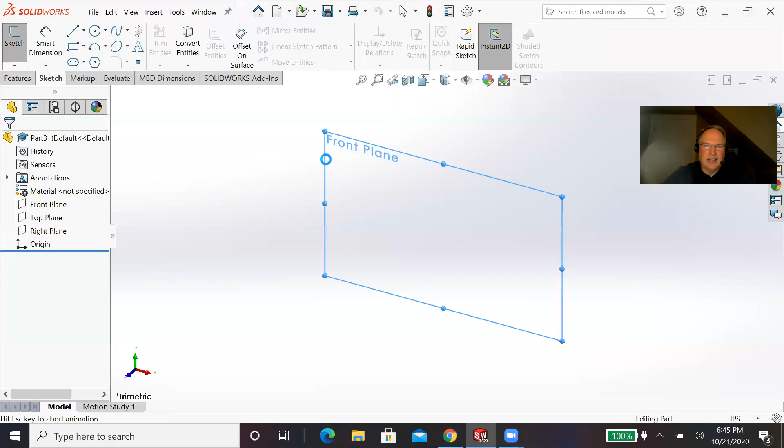You can do either a corner rectangle. I'm kind of prone to these center rectangles where you start right at the origin and it comes out from the center, just a different way of building it. Could you have done a corner? It works the same way. So I just did a rectangle.

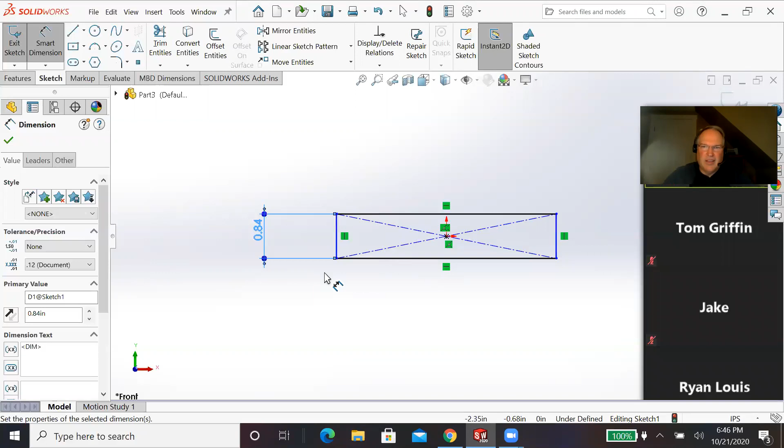I'm going to add some constraints or dimensions to it. Looking at it from the front, the total height is 0.84. Now, the interesting thing is, because I'm going to be giving you these drawings fully dimensioned, the height on the front, the height on the back, everything has to be 0.84. And if you follow the directions, you'll be fine.

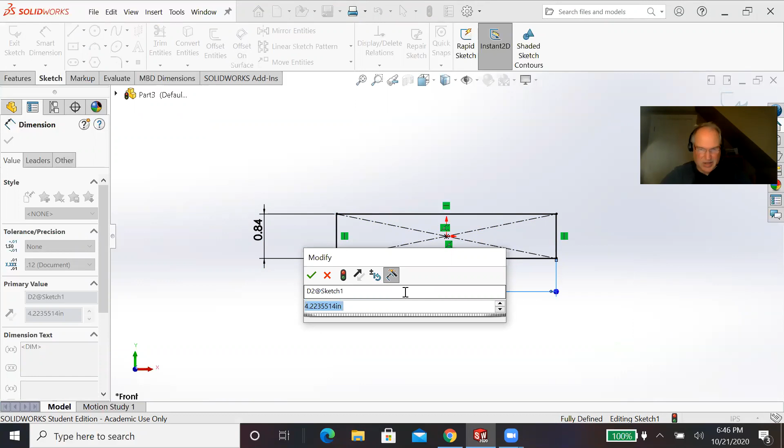But you would be shocked how many times I have students pass in parts that were all different heights. Like, the car is supposed to connect together and they're all supposed to be the same height. How did they not become the same height? You never went back and checked to make sure that your cars are all the same height. Just interesting things that you run into.

Right there, there's my basic block. We're going to extrude boss base. It has already found the profile. Profile looks good. And the depth, according to this, is 0.75 -- excuse me, 1.75. It's a square block.

For some reason that doesn't look right to me. 1.7. Yeah, okay. Now, as we are working on the next section, where do we begin?

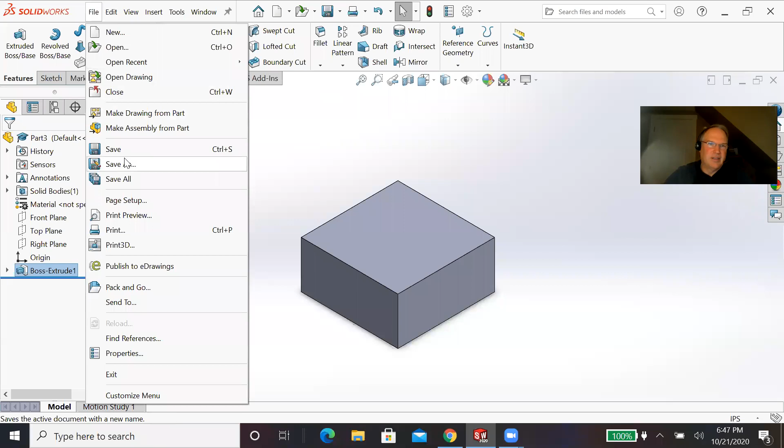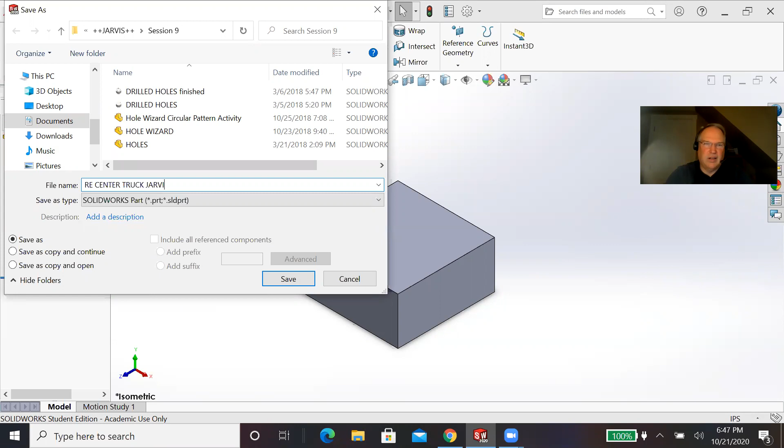That's a good question. I usually start with something simple, build the confidence up, right? Or better yet, file, save as, find your folder, session 9. I'm going to save it right in here. I'm going to call it center. Sometimes I actually put RE, center, truck, and then there. Now that I have it, it's right here. It's not going to go anywhere. You may even want to create a folder with all that stuff right in there.

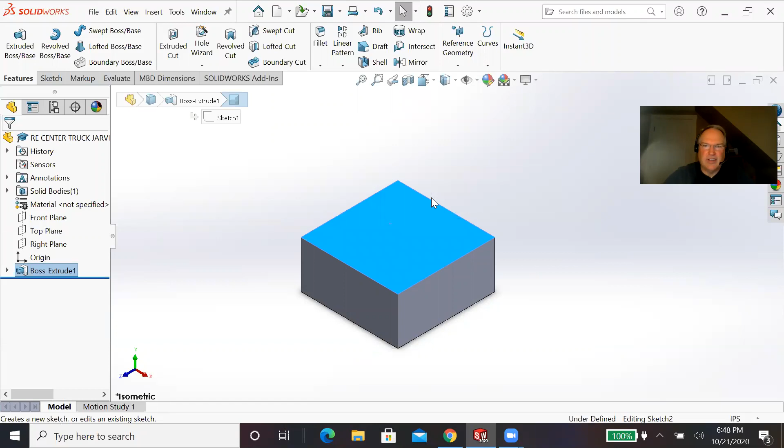So now I'll do another sketch. Sometimes I just click on the surface. I add the sketch here. I'm going to look at it from the top. I don't like the way that moved on me. There we go, I got my sketch on there. I'm going to do 2 circles. These are the holes for the top. This is the holes for the windshield. Notice I don't pay any attention to where the circles are, what size the circles are.

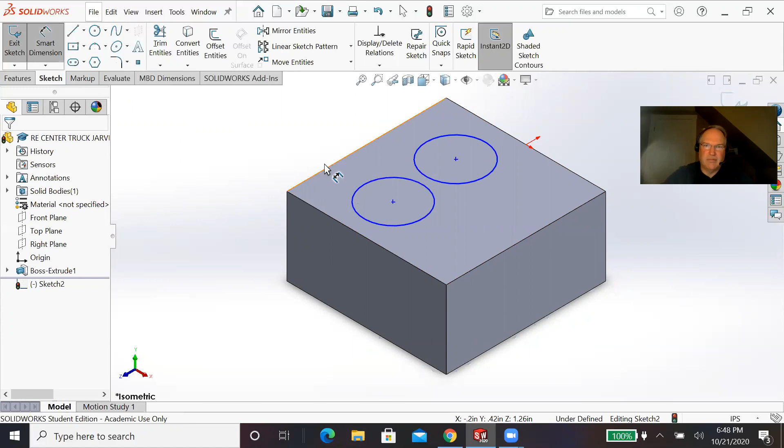It doesn't really make any difference to me because I know I have to put on location dimensions and size dimensions. I have to constrain it down so that this, from here to this center point, smart dimension -- it states that it's 0.85.

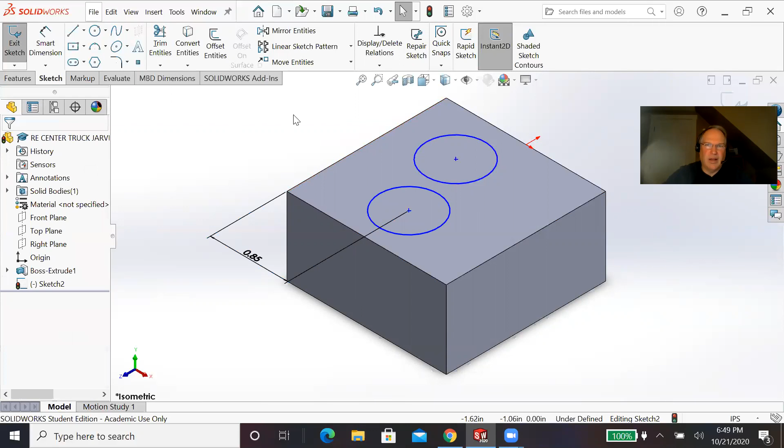Now, this is kind of interesting. I could do the same thing to the other side. I could add another dimension, or I could go back and add a relationship, add relation. I pick this center, and I pick this center, and I could say I want them to be vertical. And notice they line right up. That add a relation just saves you from dimensioning. It does the exact same thing. The good thing is, I guess, if I move this dimension, it would actually move both of them because now they have to stay vertical.

So I added that relation. So the next step would be to do another dimension from the front edge back. That looks to be 0.55. And I'm going to do the same from this side, 0.55, to make sure they're the same distance. By the way, this is probably the most important dimension. And the reason I say that is because when you line these up with the pegs, sockets in the back and the pegs on the front, they all have to be exactly the same. So it's important that they are. Otherwise, imagine that if you have all these parts built and none of them line up.

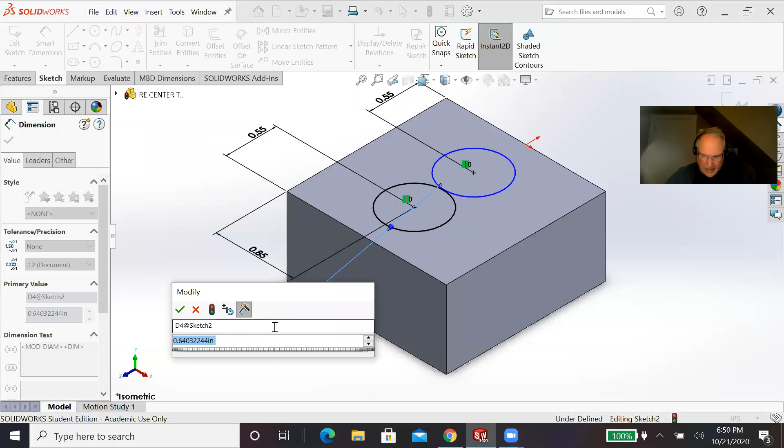It says that this is 0.4, and you can either dimension that with a size dimension, or I can go back and do my relation and say, I want this and this to be -- arc.

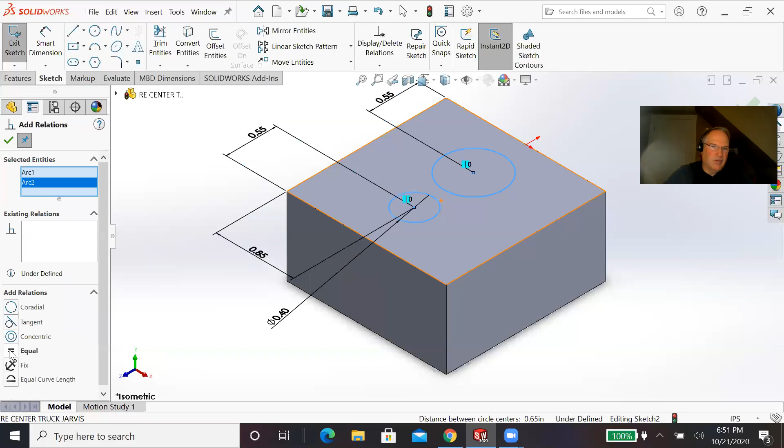I must have gone and didn't say add relation. Add relation here and here should be equal. Now they're the same, so I didn't actually have to go back and dimension the other side. The good news about that is that if I ever change the value of this, the other one will change at the exact same time.

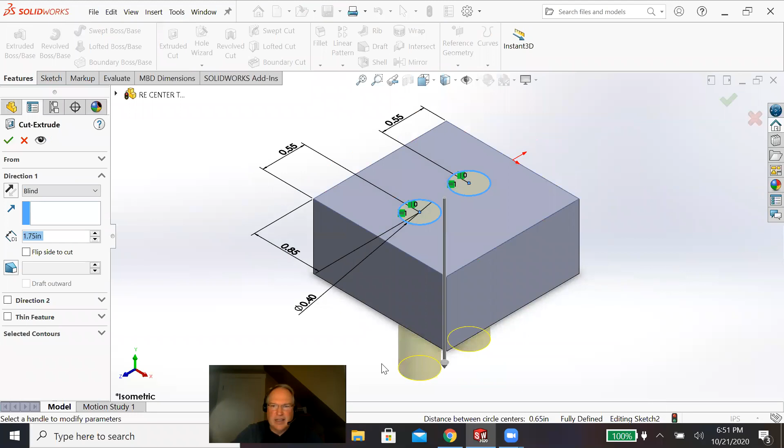Now that I've created that sketch and constrained it, I'm going to finish my sketch. I'm going to go back over, as we've done many times before, and extrude cut. Now let's see how far down this goes. There we go, 0.4, depth of 0.5 times 2.

Times 2 is a reference, meaning there's 2 of them. And that saved me from having to put another dimension on the back. That's the kind of thing you can get away with if you're familiar with the dimensioning practices. Over here it says blind hole already, so I just got to specify my depth of 0.5. And I got my first 2 holes.

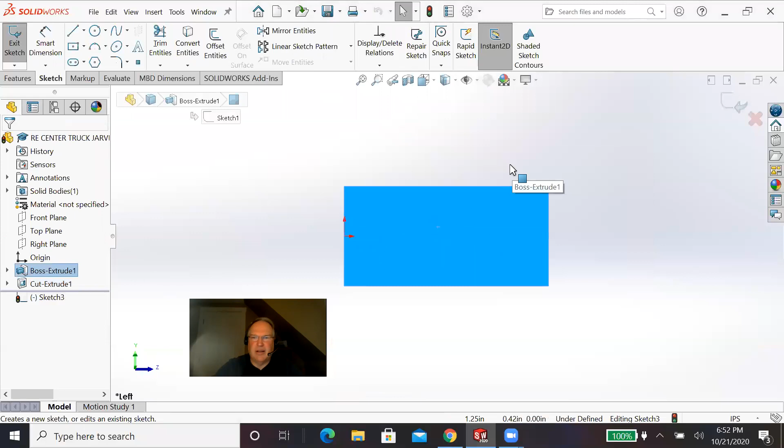Easy. Now I'm going to flip around to my front, and I'm going to build a peg right on the front. I'm going to pick on the front so I can see it better. This is how we're going to go with that. Pegs are just circles.

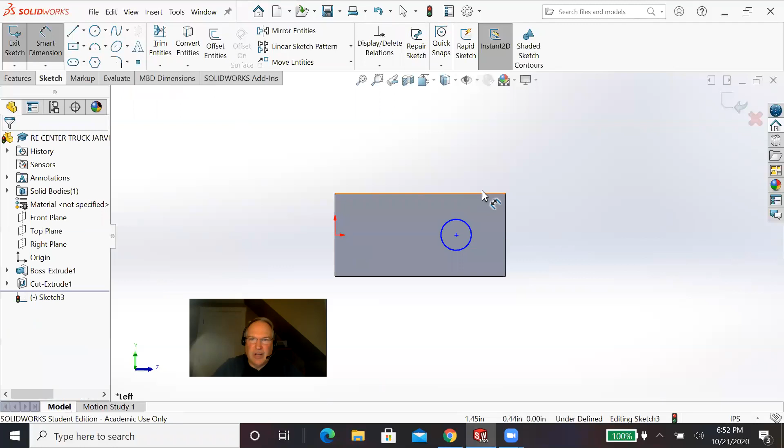Notice when I picked that, it automatically grabbed that center point, and that was okay with me because I do want it to be in the center. If it didn't happen, I would have to add a dimension. To be perfectly honest, I'm going to add this dimension just to make sure that I did connect with it perfectly, and that's exactly what it should have been, 0.55. So I don't have to even bother with it. It has to be, and remember what I said about this dimension?

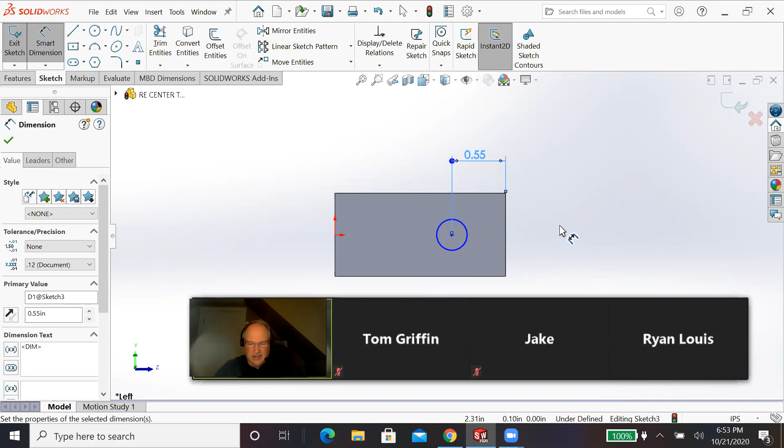0.55. Think about that. If there are sockets and the pegs are in different centers, different locations, your car is not going to go together, and that's not going to be much fun for you.

So next, I'm going to do this dimension, and I always start with the biggest part of it. Looking around, it appears that the biggest part is 0.33. Finish my sketch. I always go back and look at it isometrically when I do my extrusions.

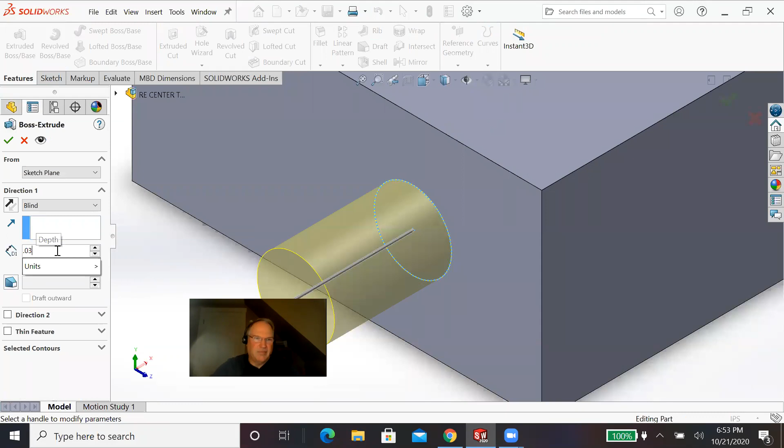Now this first part, it only extrudes out for 0.03, so it's not very far. 0.03. There's my first extrusion. I'm going to make another sketch right on that surface.

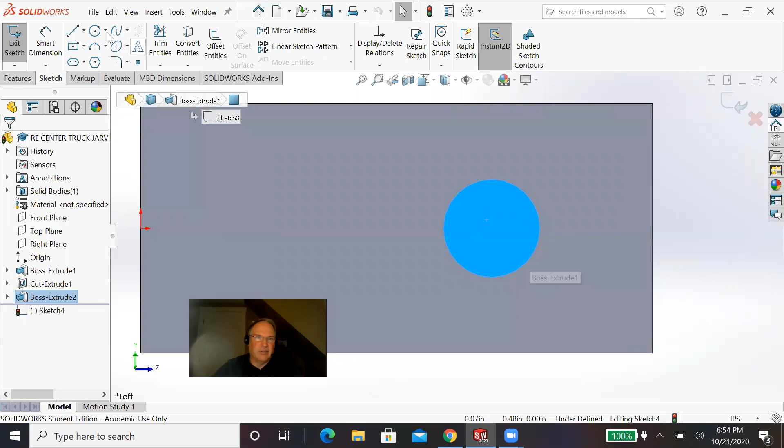Now because I already have a circle there, it just makes it a whole lot easier to create another circle. If I come down and try to pick the center, it doesn't work, but if I pick the outside, I don't actually pick it, I just see how it gives me the center now, and it'll snap to the center. The second one, I know I don't have to dimension the location because I've got the center. The second one coming out is 0.25.

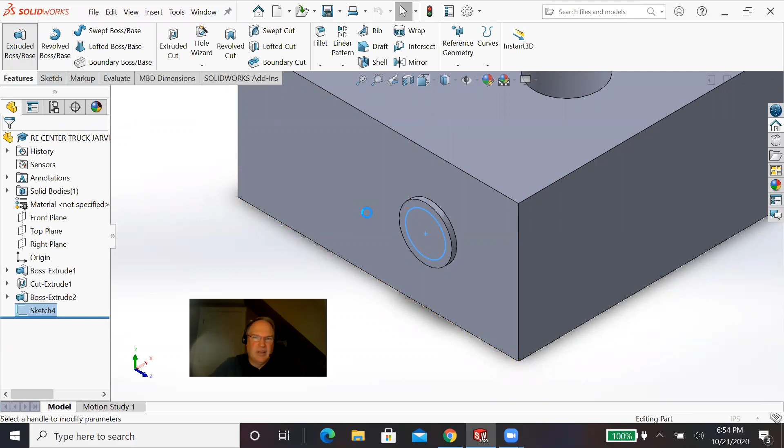Finish our sketch. Now I'm going to go extrude. As I'm looking at it, this one's going to come out, and once again you got to go back and kind of make reference up here. Coming out 0.33 minus the 0.03, because I'm coming out from the front of that surface at 0.03, I think. So I'm just going to come out just 0.3. It said 0.33, isn't that funny?

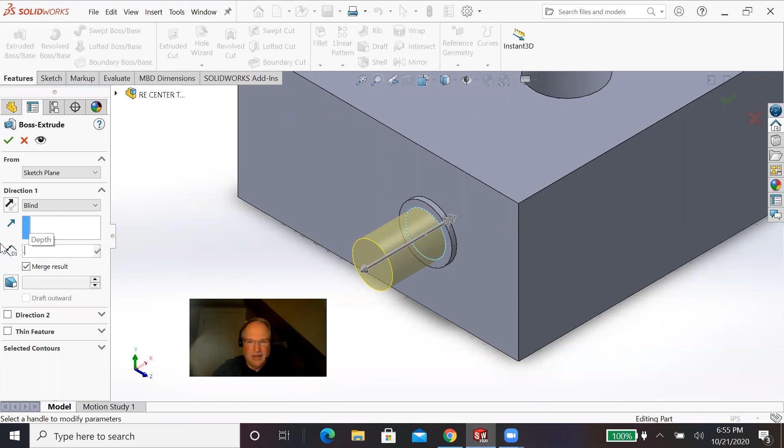Check. There, I got part of the peg. I'm going to do the same thing over again. Repetitive. Back.

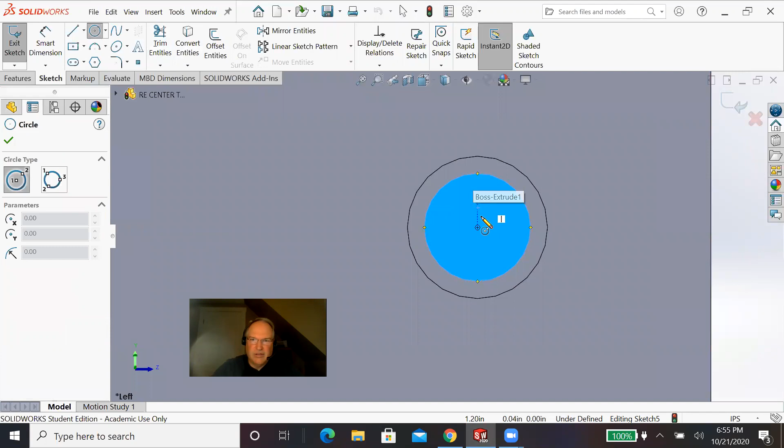Creating the same center circle. These are all concentric circles. This one's a little larger. I think that actually is right, 0.28. Is it 0.28 exactly? No, not even close. 0.28. Finish my sketch.

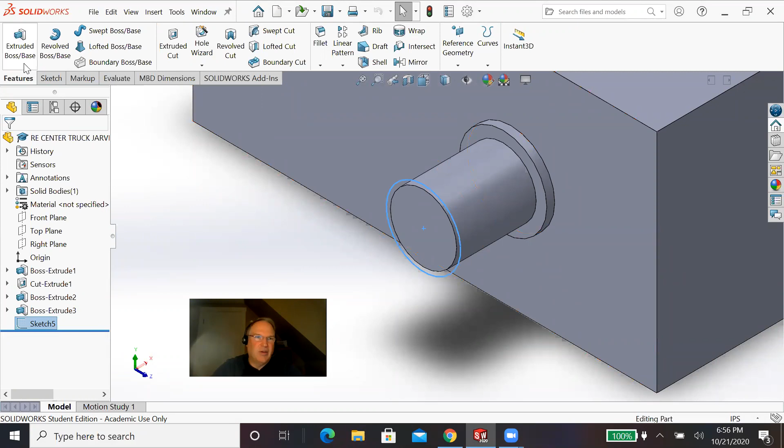If you extrude it while it's not in isometric mode, it just makes it difficult to really see are you going forward, are you going back. In this case, when I go to extrude, I'm going to go back, so I'm going to switch directions. And the distance is going to be the same as it was on the front, or on the inside, I should say.

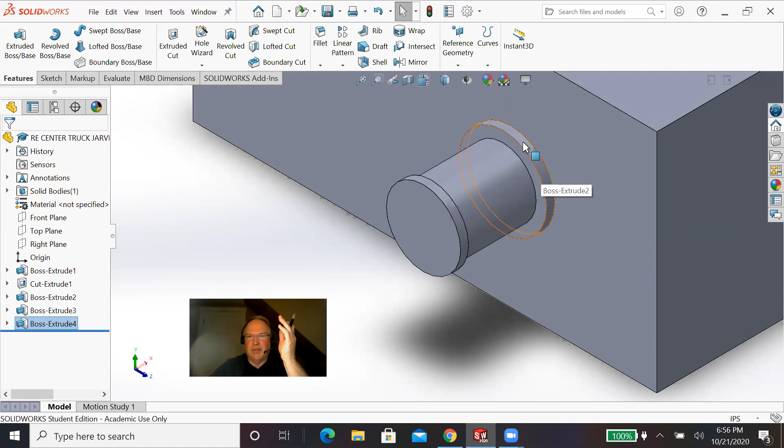So now really all I've done is 3 circles: this one's 0.33, 0.25, 0.28. That's all I've done is 3 circles. The next step would be another circle. Hard to believe, yes. Sketch.

On the front, this is the one that's going to cut the hole out of it. And the hole that goes through is, I think it's 0.4 - oh excuse me, 0.20. So I'm going to confirm that that's correct. 0.20.

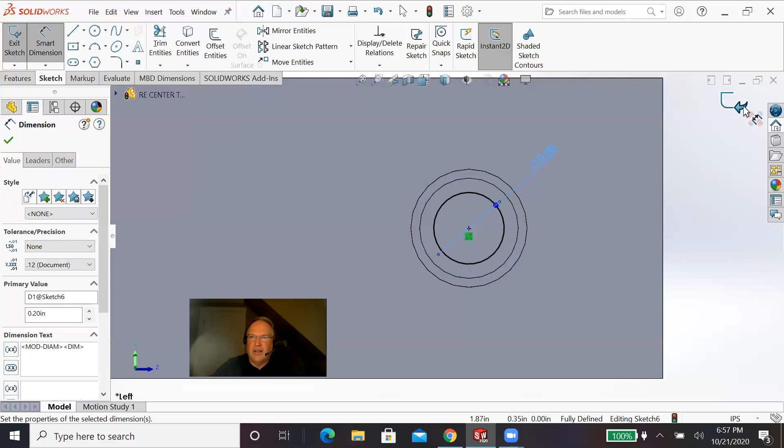And the depth of this, I keep going to that side. The depth of this one is going to be 0.5. Oop, see, I just did extrude, I've got to do extrude cut. There it is. It's funny that I didn't pick that out. Maybe I put that. Sometimes you bring your parts tree over here, pick on your sketch, cut 0.5. I thought it picked it out automatically, but maybe it didn't.

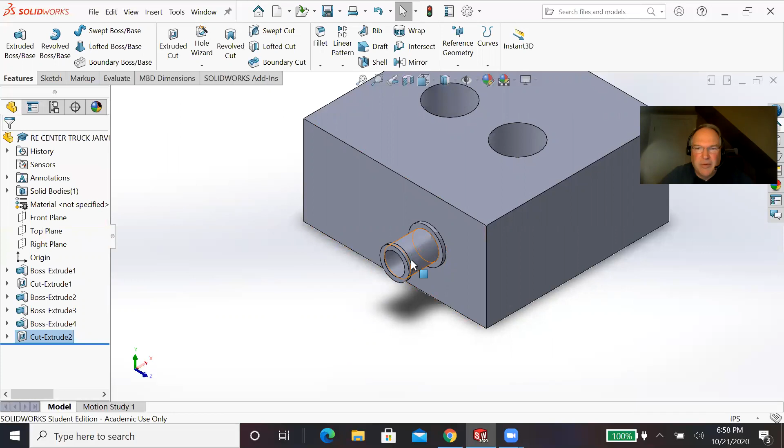So a lot of circles: 1, 2, 3, now 4 cylinders basically cut out, the last one was cut out to give you that shape. Now it's all the little nuances that make it look better. For instance, if you look carefully, it says that there's going to be fillets all over it, so I can come up and use my fillet button.

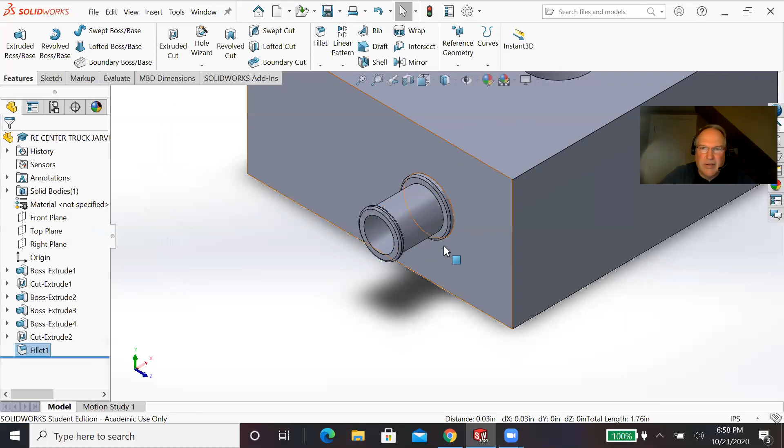And I'm going to type in 0.01. There's a series of 0.01 fillets - one here, one on the inside, and one here. You can see that it's just going to round it over, making it look kind of cool.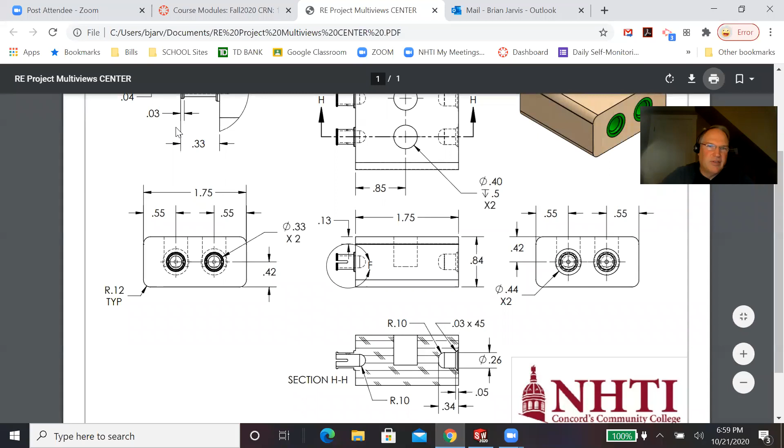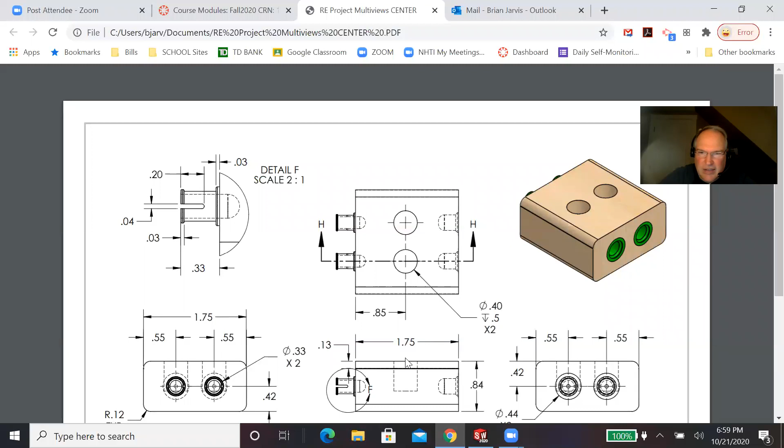Not looking bad. The interesting part - see how it has this little groove right here? There's a slot cut in here. This is going to give that end of it a little bit of flexibility, so when it goes into the socket, it's actually going to push out and really hold it on there nice and tight. So this is a 0.04, and it goes through both sides of it. Now, a lot of students think that's probably one of the hardest parts.

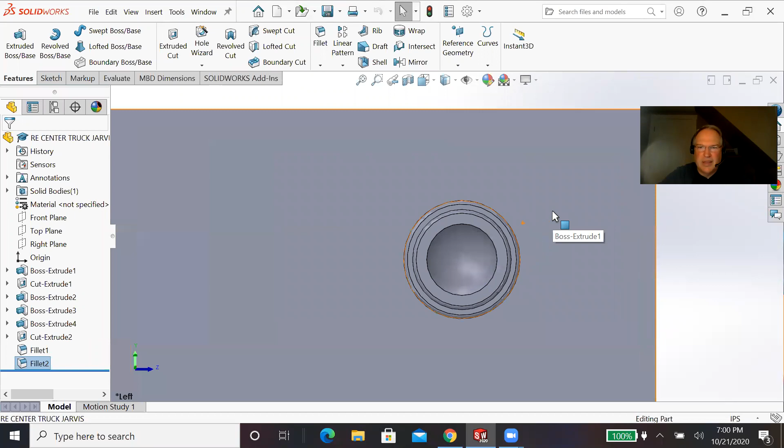The truth is, it's not hard at all. To do that, I'm going to look at it from the left side here, and put a sketch right on this outside surface. Right click, add a sketch. Remember this center point rectangle? I can still pick my center point, and I'm just doing a rectangle. Doesn't matter how big it is because we're just going to end up cutting it right out anyway. Boom, 0.04. And that's it. That's all you had to do for the sketch, which is kind of nice, right?

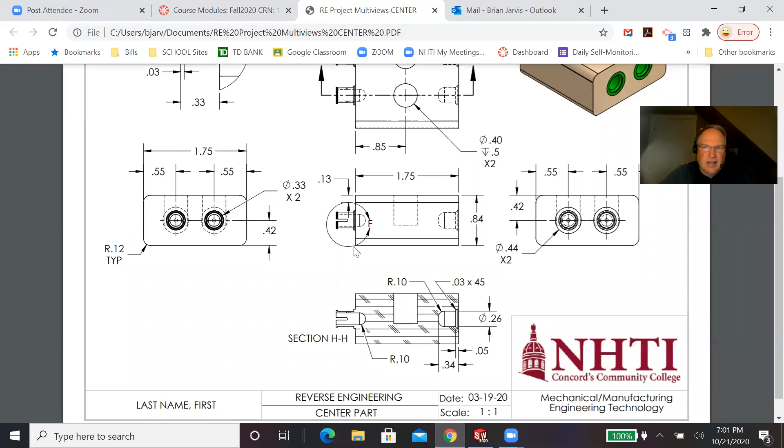Moving ourselves around a little bit. Then I'm going to go back and finish my sketch. Extrude cut, cutting into it. Must have a depth here somewhere - 0.2. Cuts in at 0.2. And check.

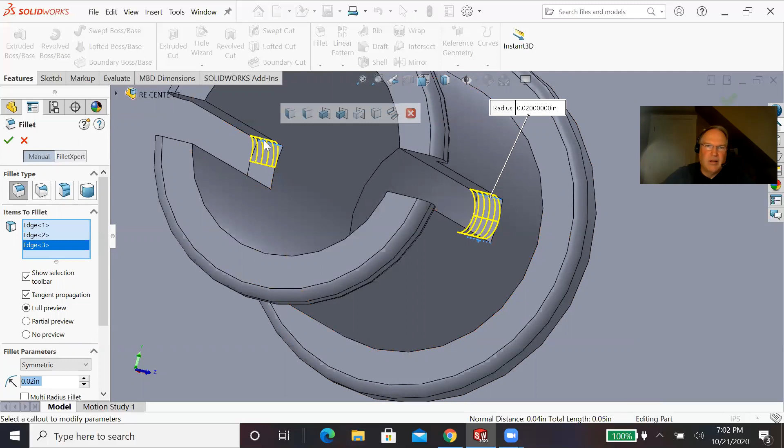So what looked to be pretty difficult, actually, if you use that center point rectangle, ends up being pretty straightforward. Now these are 0.02s to round the bottom. That's what I love about fillets - you can round a bottom with a 0.02 radius, rounded. Notice how I just picked the corner, and just picked the corner. And there you have your peg.

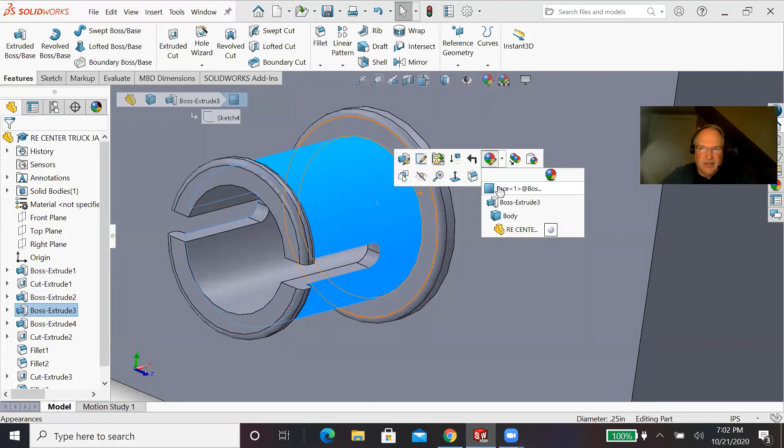Now, it doesn't look very good right now, so we're going to change the appearance of it. Some of you probably already know this, but if I select any surface on that, I can go to Appearance, and it says Face - I just want to change the face appearance. It allows me to pick a color. All these end up being pretty green. See how that picks? I can pick every single one of these faces, and it's going to, because they're all interconnected, turn them to a green color. The pain is trying to get all the different faces, the inside, outside.

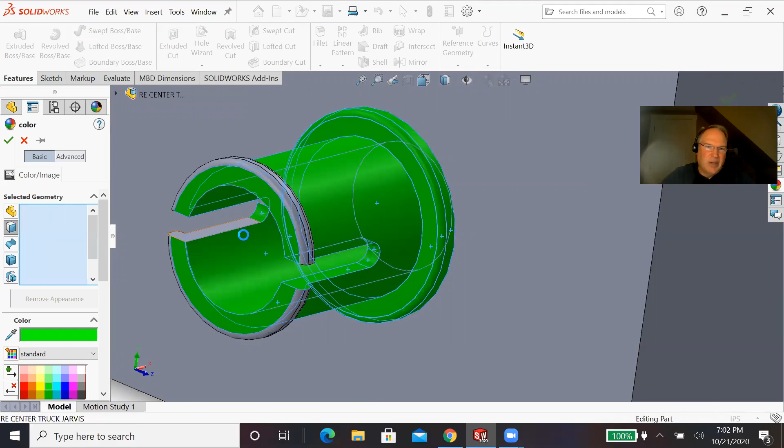I'm picking every single face that I can see from this point of view, and then I'm going to move it, and get all the ones I missed. As you'll see, I missed that face, and that face, and even this little tiny face here. Now, this is not changing the material at all - the material stays the same. What is changing is just the appearance of it. That's it. So I want to make sure I get them all before I hit yes. That's why it pays to move it around a little bit. Check.

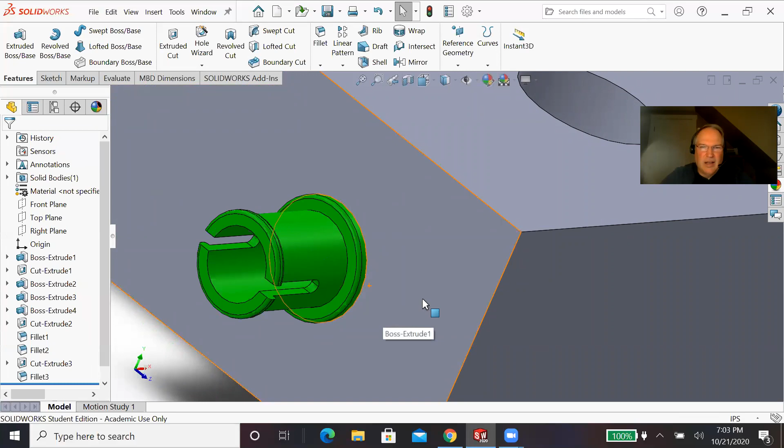Yeah, that's looking better. And that would be our peg.

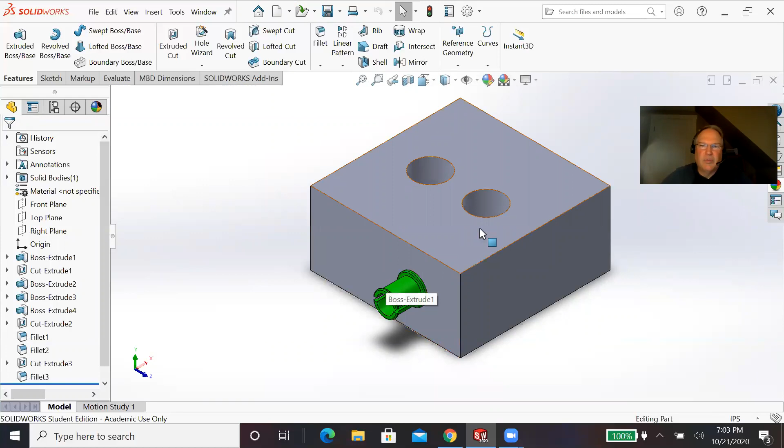Now, for those of you that were worried about having to do that again, guess what? You don't have to do that again. The one on the right and the one on the left are exact mirrors of each other, so we're going to mirror it over. Could we have done that with the holes on the top? We certainly could have, but it really isn't necessary - there are two very simple holes cut out at the same time.

Before we can mirror something, though, we have to have a mirror plane that goes right down to the middle of it. So I'm going to go plane. It says, where do you want the plane? Pick the front, and then we're going to go around and pick the back. Notice it automatically assumes you want a mid-plane, puts it right in there for you. Just hit check. And this is the fun part of it.

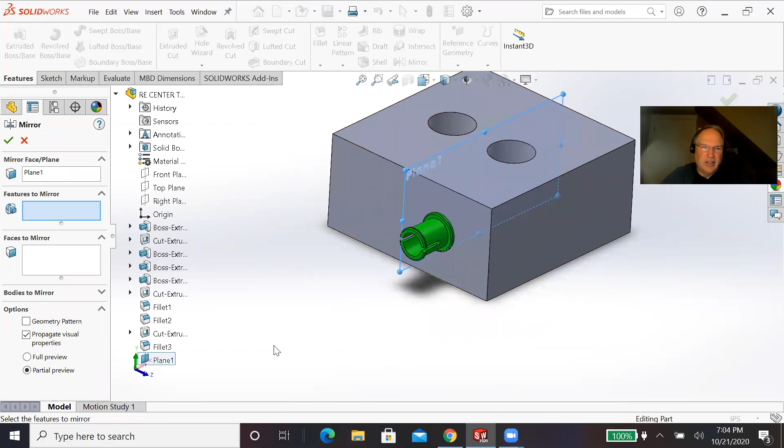Once you have the mirror plane, then you're ready to start to mirror. Now, when it comes to mirroring, I strongly recommend that you - well, it says pick the mirror plane first, so I'll pick the mirror plane first. Now it says, what do you want to mirror? Every one of these features has to be selected. That one - see how it comes, it actually appears. Every one of these features has to be selected, in technically no particular order. But once you have them all selected, how about this piece? What's that one? Yep.

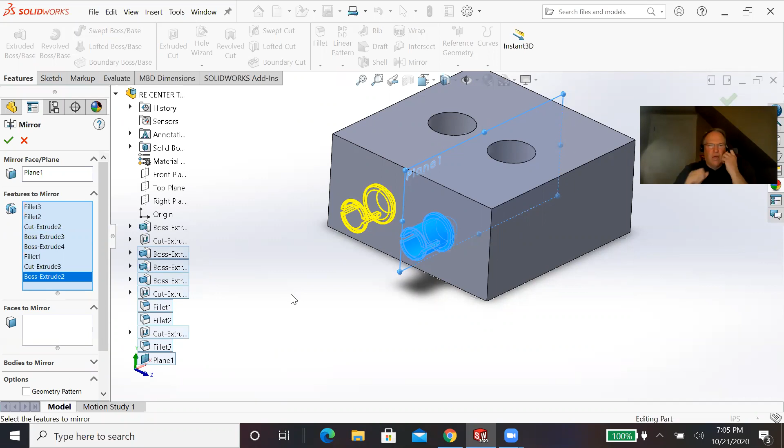Once you have them all selected, you simply say check, and you have the opposite side done too. You've got to think about all the different ways you can make this move a little faster. The sockets are a challenge as well.

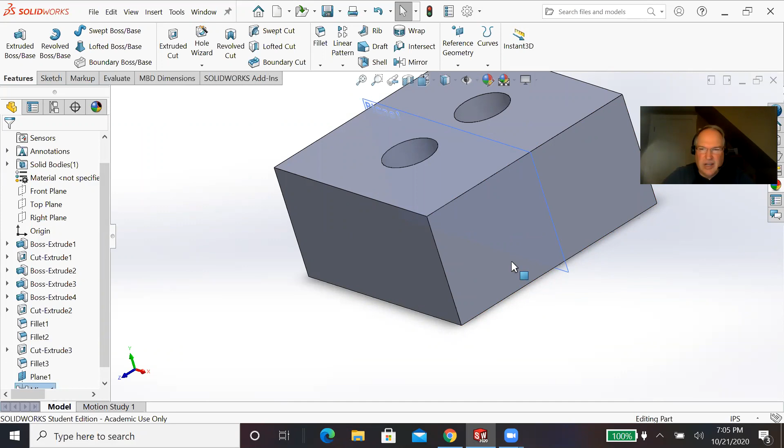They're not nearly as bad as the pegs, but the sockets definitely are a challenge. So we're going to start with a sketch on the back. I'm going to turn it around so we look at the back, and then start with the circles. I could do some reference geometry and pick the center to make sure they're all concentric - that's probably a good idea, to make sure this lines up. Remember what they're supposed to be - 0.55. They all have to be the same, 0.55, right? They all have to line up.

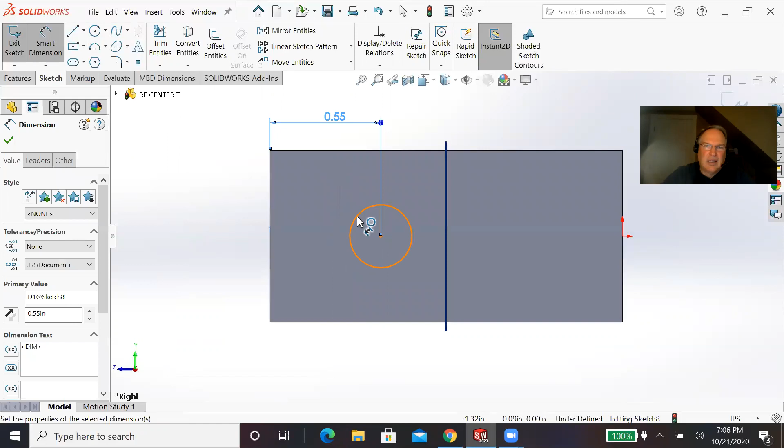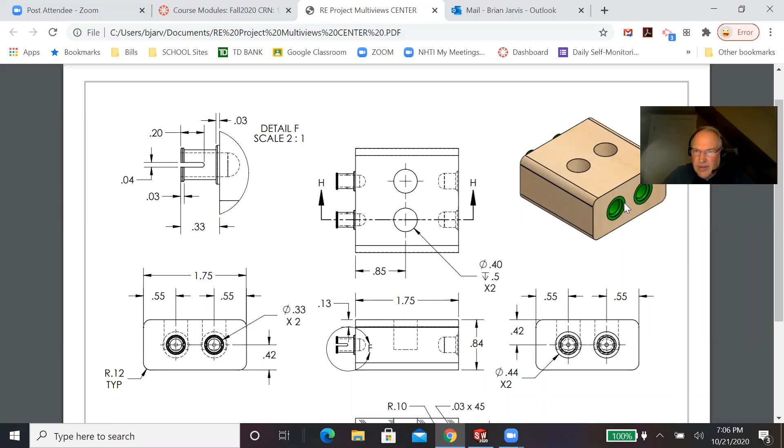This, from the bottom or from the top, shouldn't matter, should be 0.42. Because I hit center, it did it. And the first diameter we're going to put in - as we look at our part, we're building this side of it now. These sockets will be here on this side. 0.44 is the very outside, but that's not really the one we need to worry about.

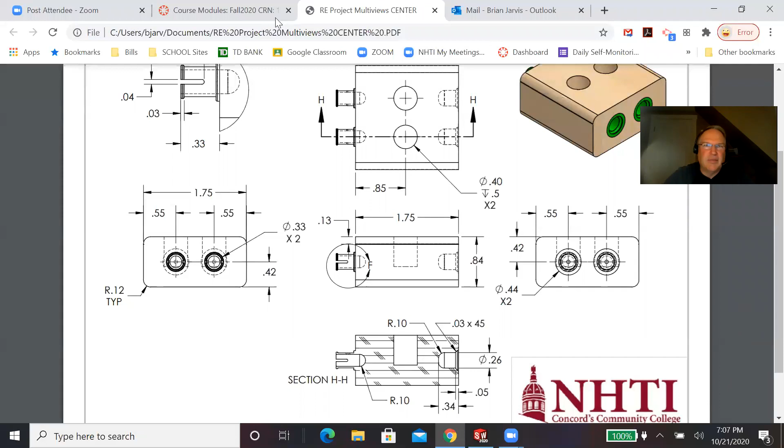I want to say - I'm looking at that, just trying to see if there's a specific one. It's 0.30, so it looks to be 0.32. Once again, I'm going to make sure all those dimensions - that's not the most up-to-date one right now, 0.32. I thought that was 0.33. Oh, I did see the dimension on the other side. It's 0.33, my apologies.

So this time, I'm going to start out simply by cutting this out of here. Once I have it set in the proper position, I have my two location dimensions, I have my diameter dimension, and I'm ready to start cutting this out. So we go to extrude. And this time, interesting enough, it only goes in 0.02 of an inch, actually.

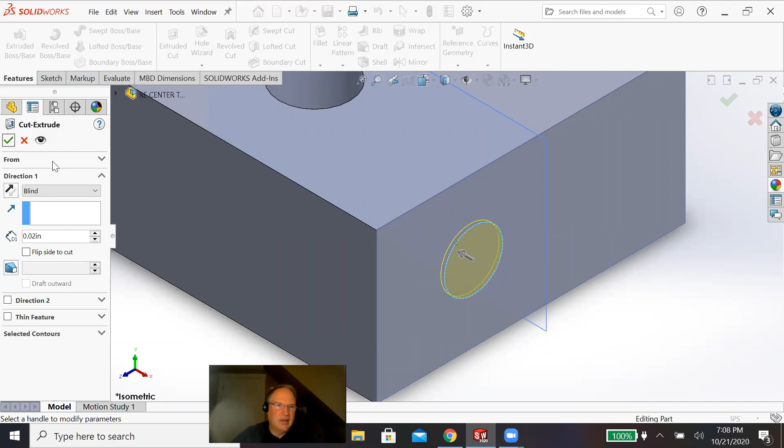0.02, very tiny. There's your first cutout. Just like we've done before, pick that surface, add a sketch. I look at it from the right side. I'm going to drill another hole.

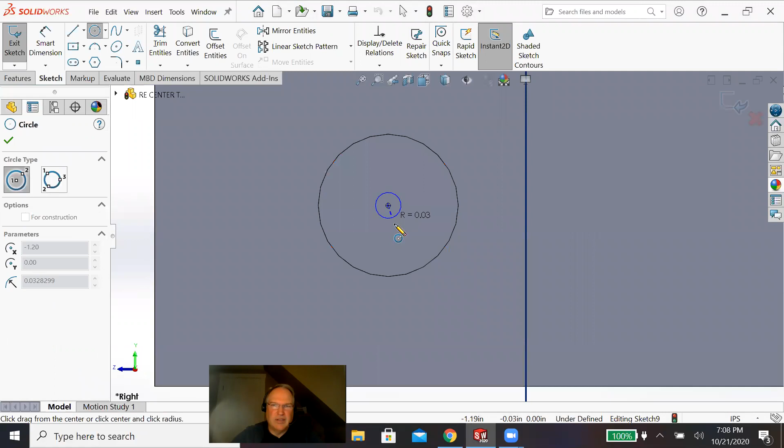I always try to make sure it finds the center there. This one is 0.26. Finish your sketch. We're going to use our extrude cut again.

Once again, we're building the socket in which the peg is going to fit. This one goes back 0.32. Cut.

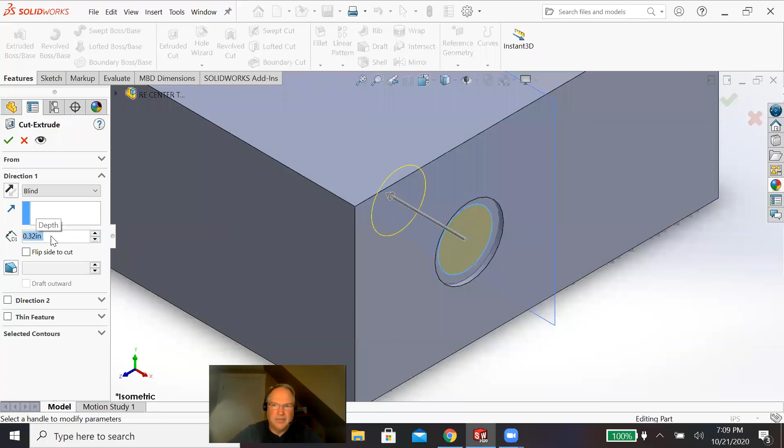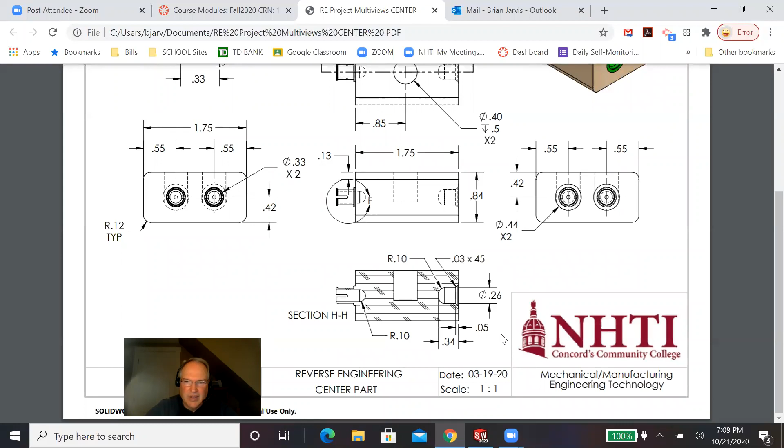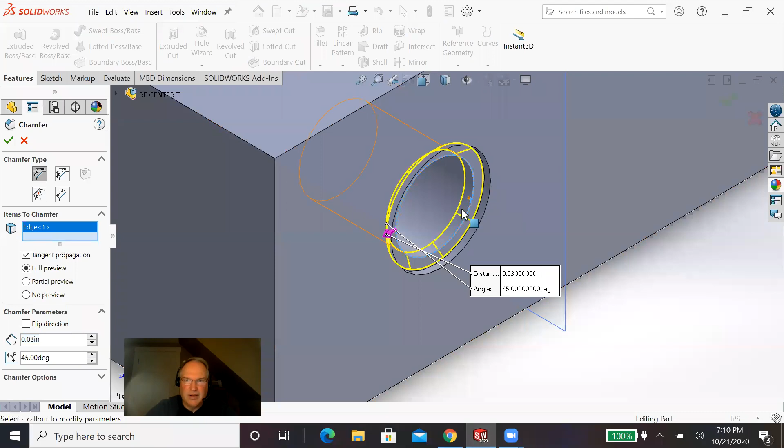So it gives you that taper as it goes in the socket. And then we're going to add a fillet to the bottom, which is the same 0.1 fillet that we used on the other side. Pick that bottom corner. Because this is a bigger hole, 0.26, it left a diameter right there in the center, but that's not a big deal.

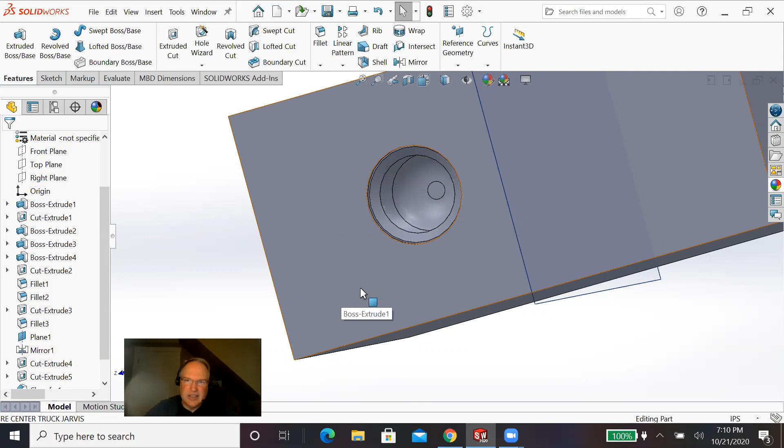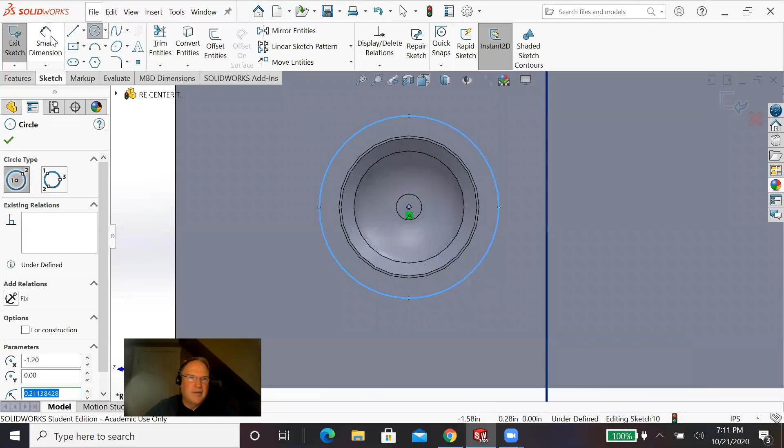Now, this one has a slight recess on it, so I'm going to do one more thing. It's really more for looks than anything. I'm going to put a circle sketch right on this outside piece, and look at it from the right side. Center. Like I said, it's a cutout, but it's a tiny little cutout.

It's 0.44 from the center. And this time, just to give it a look, it's going to be a different surface so I can color it differently. I'm only going to cut it out, and it doesn't have to be much - 0.002, 2/1000 of an inch. And you'll see there's just the tiniest little recess right there. It gives you the illusion that something is drilled out and placed in there.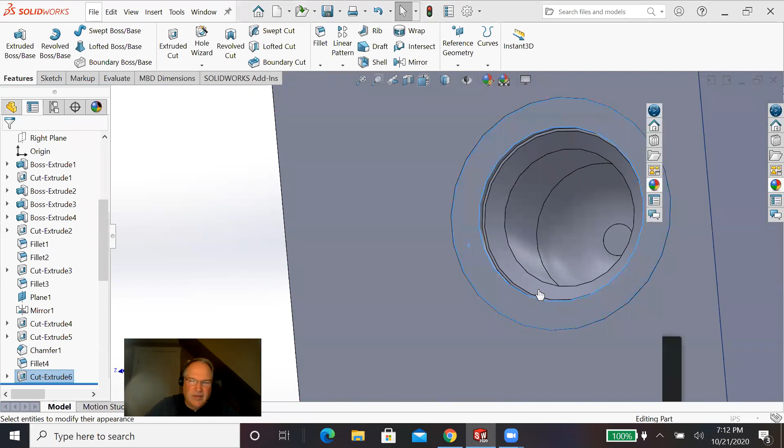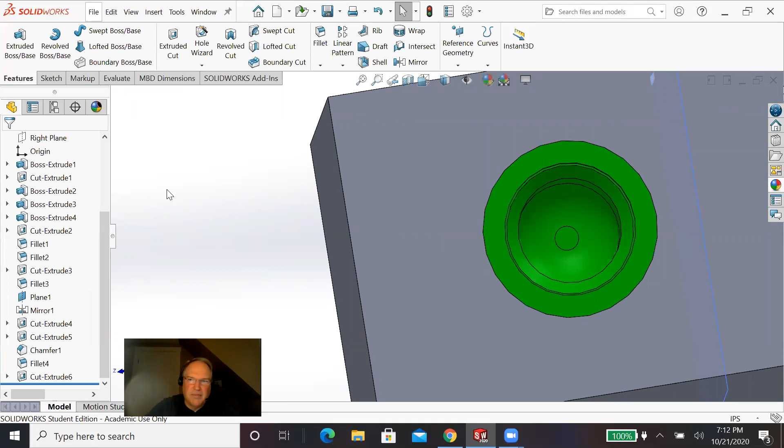Like the other side, I'm going to do the same thing. Notice I picked on it, and I come over to Appearance, Face, and I'm going to use the same green color, changing all the surfaces to green. Even the tiniest little edge. Now, maybe I'll leave that one because I want to change that one too later on. Check.

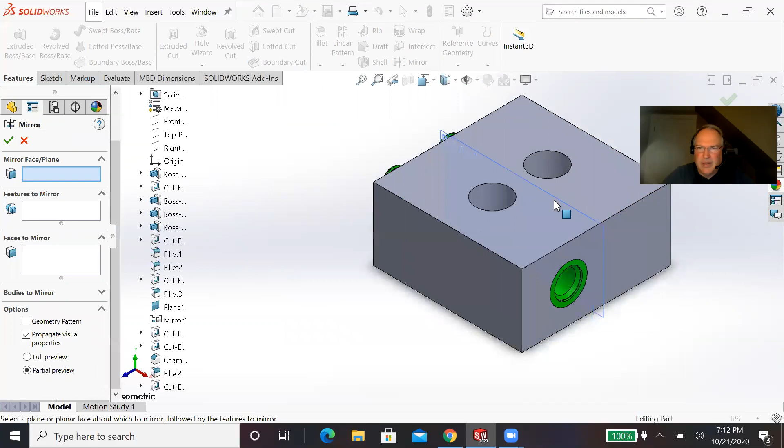So now I have a peg, 2 pegs on this side, and a socket on this side. Once again, because the part is symmetrical, we can use our mirror command. We'll scroll down to the bottom because all of the parts I just built are kind of down to the last pieces. The first thing you want to do is pick the mirror plane. Pick the mirror plane. Whoop.

And then you want to pick all the little pieces you built. So pick that, that. Sometimes you have to hold your shift down to pick multiple parts to it. And you can see it all coming together there. I don't really need to. And now I have 2 sockets.

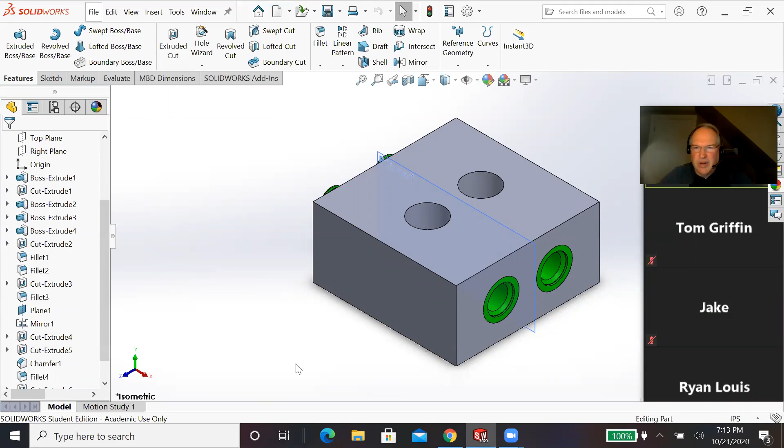Now, if I'm done with my mirror plane—which actually I'm not done with yet, I'll show you why in a couple minutes—but when you're done, you just right-click on it and change the visibility so you don't see it anymore. If you try to get rid of it, it's going to get rid of your mirrors, so it's not something you want to delete.

Could you quickly go over how you got that plane there? I missed that part at the very beginning. Yep, it's quite simple, actually.

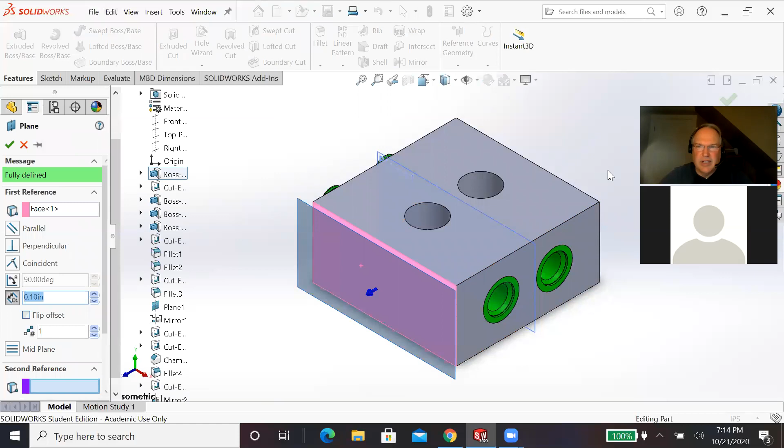You just go to Reference Geometry, Plane, pick this side, and then pick the other side. And I love how it's intuitive in the sense that if you pick two planes or two surfaces, it's going to put the plane right dead center in the middle. Okay, that's it, cool, thank you. Yep.

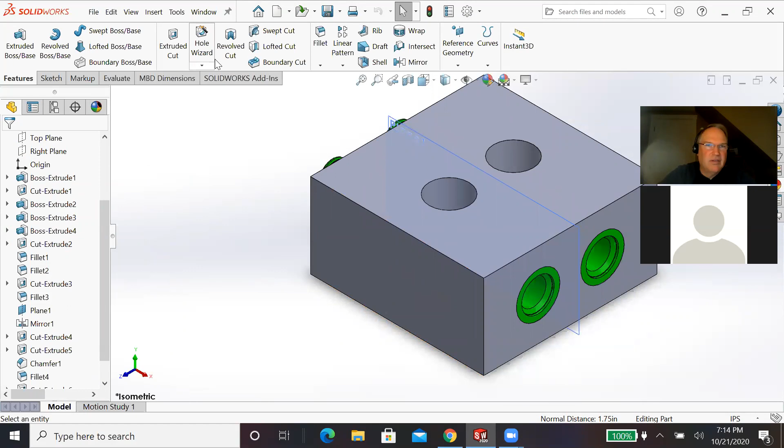So now, when we're looking at it here, we've got to add some fillets on all the corners—all the corners are filleted. Obviously it's some sort of kid toy, so it's got to be safe, you don't want those edges on it. I think it's 0.13, not 0.3.

0.13, pick. Pick. Notice I pick all this one—some people do a fillet and pick one side at a time, but whoa, check that out. When I picked that flat surface, it picked them all, right? It picked that face. I'm going to clear that selection and start again.

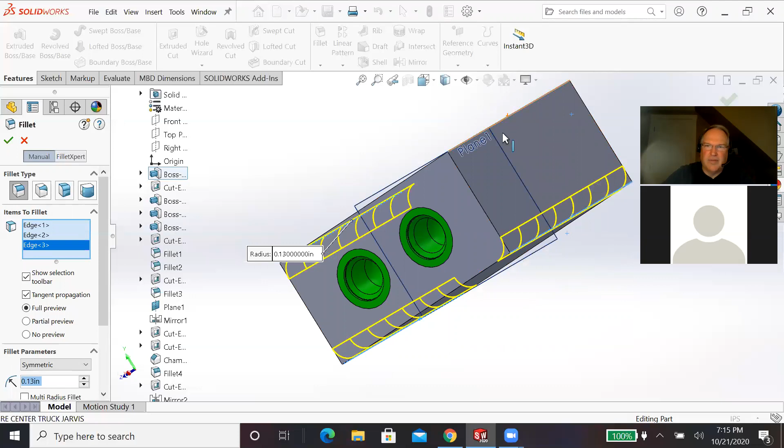That corner, and then I'm going to pick this corner and that corner. Once I have all four of my corners selected, I'm going to fillet them all.

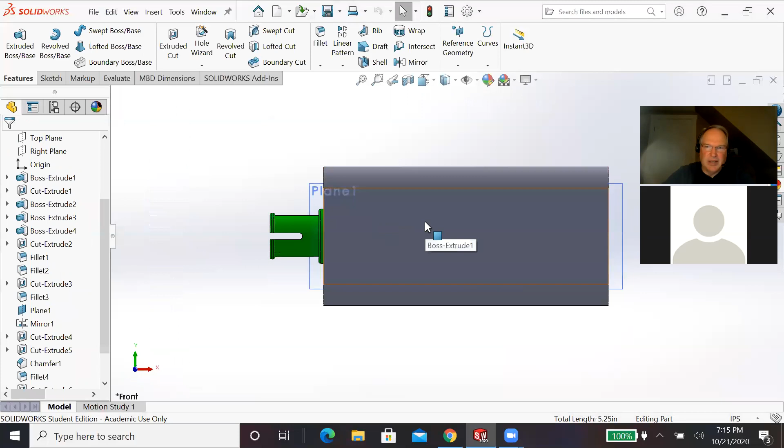Now, believe it or not, there's this really tiny little thing right here. A lot of students miss it—there's a little groove cut right across here. It's so small, it's hard to see, but I'm going to go back and add a sketch to that front surface.

Now, if I'm cutting a very small groove all the way across there, I'm going to use corner rectangle. Notice where I started—I'm just going to line it up here and drag it all the way across, like that. There's a groove on both sides of this; all the parts, the back, the front, everything has a groove through it. This groove, when I say small, it's definitely small.

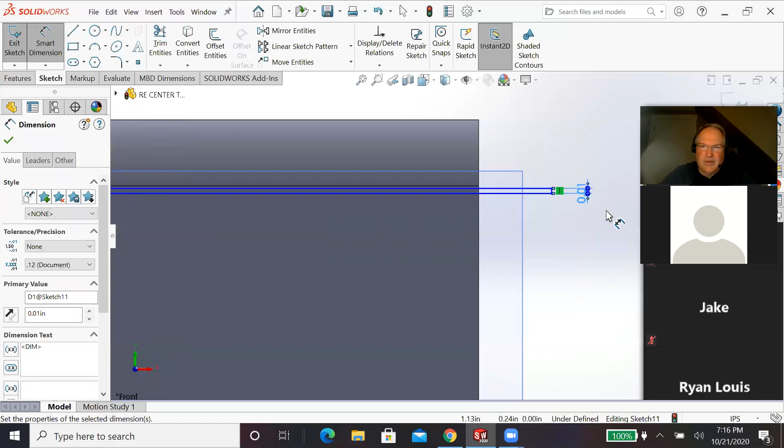The groove is 0.01, so it's tiny, and from the top down it's the same distance as the radius of the fillet. It's ever so small there.

And when you cut it out, notice, because I'm cutting it away, I didn't care about how far out it came. A lot of people try to cut it and make their rectangle start right on the edge, but remember, whatever we extrude or cut out of there—it doesn't matter if I cut it out of space over here, it makes little difference. You can see the distance going in is minimal too, I want to say 0.01 deep, 1/100th of an inch deep.

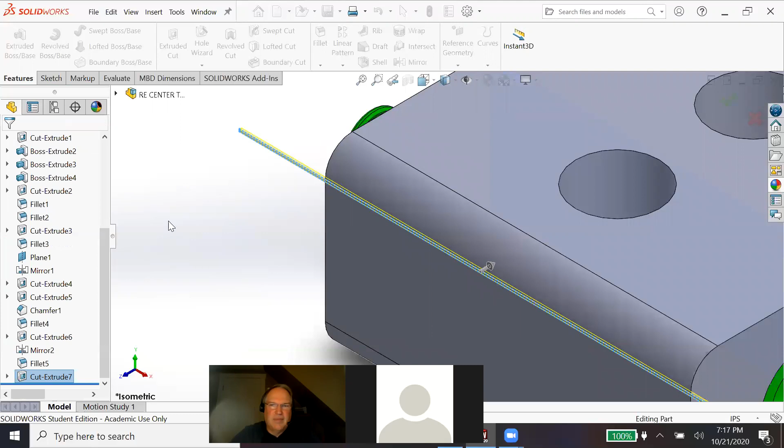And it leaves that little tiny groove right through there. As I mentioned before, I could cut that out on the other side, or I could just go to mirror and pick your mirror plane. Sometimes you have to open up your parts tree to be able to see the part you want to mirror—that last cut, right? Let's see, pick... there it is. And see how it cut it out on both sides.

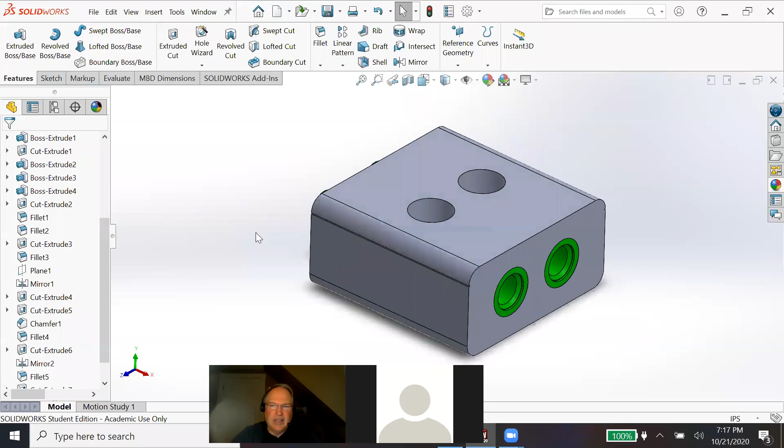And because I'm just about done with this part, I'm going to go back up to my plane—here's my original plane—and I'm going to turn off the visibility so I don't have to see it. And to give your part the realistic look it needs, they're actually made out of hard maple, so I'm going to go back and edit material.

Let's see, wood, maple. Maple has a lot of nice properties. We're going to hit apply. If I can get... there it is. It actually makes it look pretty darn good.

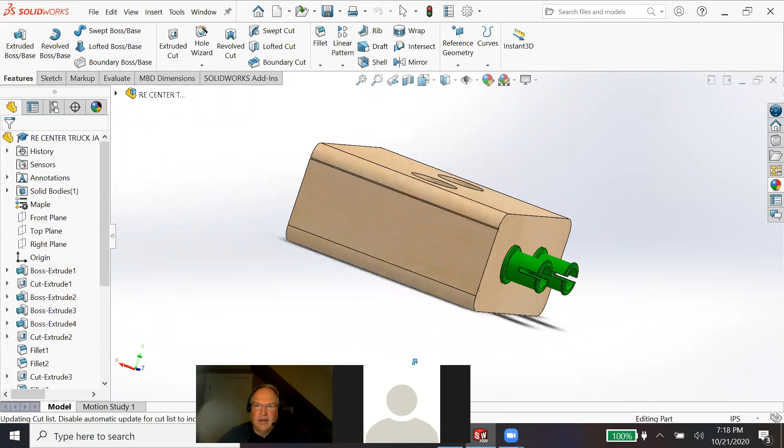And that would be the center part of your Automoblox reverse engineering project. Most importantly, save.

You know, because these programs take up so much space, they do tend to crash a lot. So, oh, by the way, I didn't mention this at the beginning, but you always want to double check your units—inch, pound, seconds. God forbid you started out in millimeters and then everything would have been messed up there, right? So that is how we are going to construct our parts.

Next week, I'll be showing you some of the other parts and how you can derive a part from this part, which actually makes it easier. But that's what that is. Any questions?